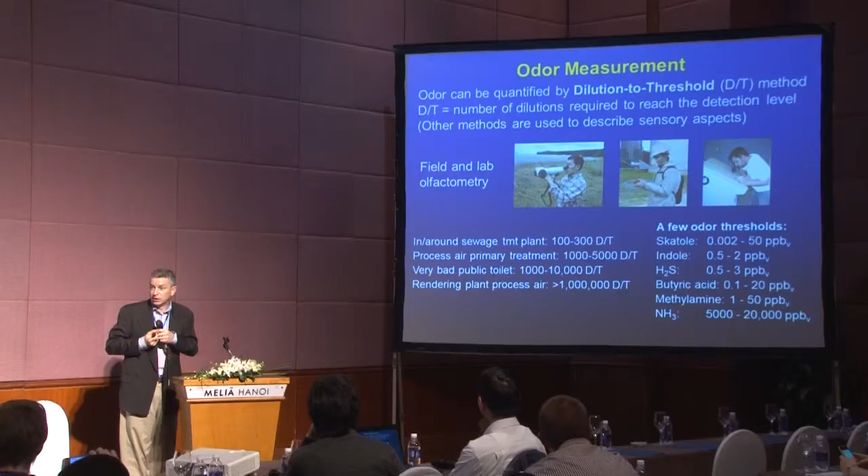Here I'm showing the concentrations that would bring it to the odor threshold of a few substances found in fecal matter—skatole, indole, hydrogen sulfide, etc. What you see here is that the concentrations are extremely low, meaning just a little bit of these chemicals goes a long way in creating nuisance. This speaks to the challenge we have in controlling odors.

There are a number of ways to control odors, and I'm not going to go into a lot of detail, but they can be grouped into essentially three categories. One is preventing odors from being formed or released. One is controlling odors as they're being formed so they don't reach a receptor—this can include capturing or destroying the odor, or transforming it into something less odorous or non-odorous. There are a number of techniques that can be used to control odors, and we'll hear more as well about sensory methods.

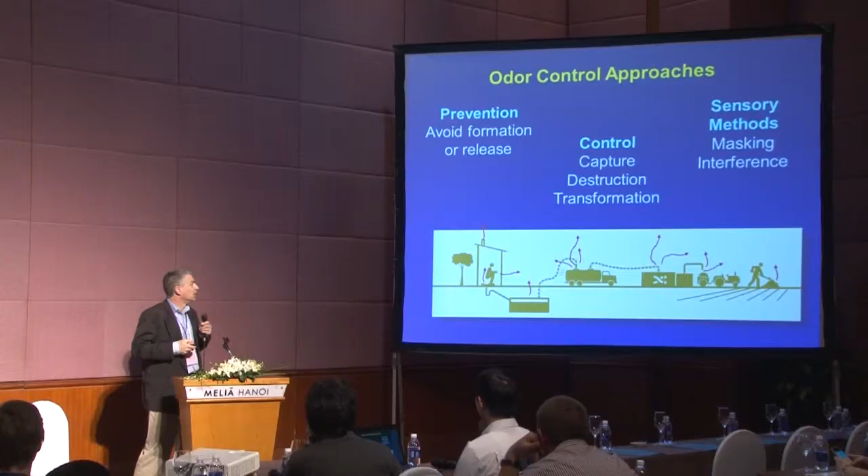Masking refers to adding another smell that will overwhelm your senses. Interference is kind of tricking you into thinking that things do smell nice. We'll hear more about that and discuss it too.

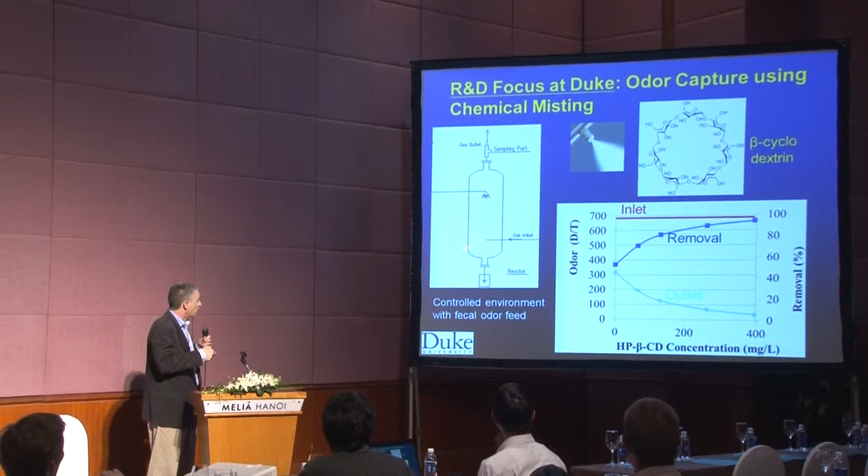We've also been playing with an ingredient of Febreze, which is a cyclodextrin—its cavity is great for capturing smell. We do that in the lab in a controlled environment, working with a reconstruction of fecal smell, and smelling it before and after. This is just a graph to illustrate the sort of studies we do. I'm going to turn it over to Karl here to tell you what he does in his lab.

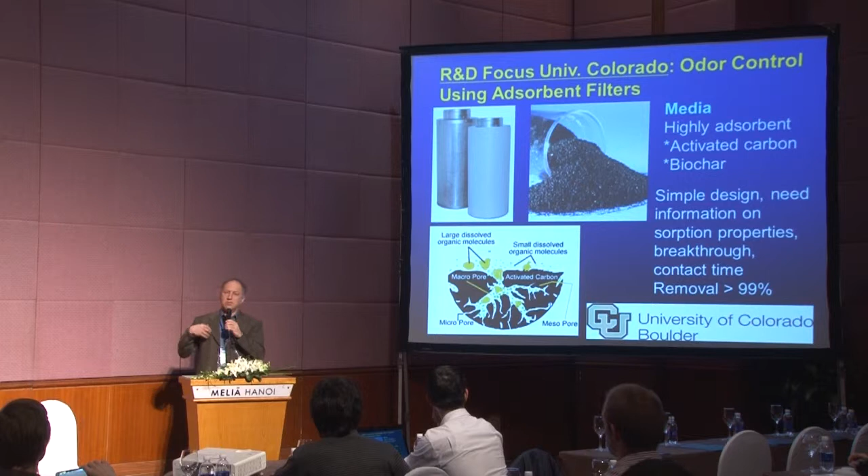In our lab, we're mostly focused on activated carbon type approaches to odor control. Specifically, we've been developing biochars and characterizing those for removing various contaminants from the air stream, the ones Mark talked about. We're also looking at contaminants and odors from combustion processes, such as fecal sludge management practices that use combustion to treat waste, and how we deal with the odors, smoke, and particulates from those processes. You can see some activated carbon and the mechanisms by which those can remove odors up on the screen.

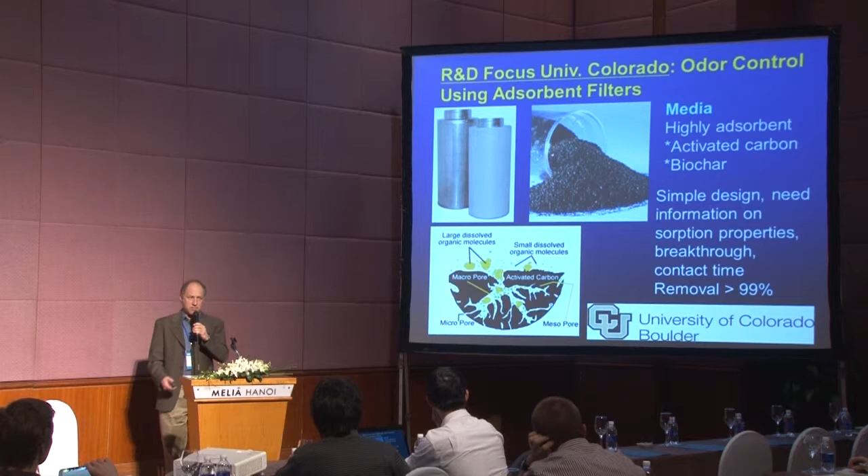Mark and I have a project we're just kicking off on odor management, and each of our groups is looking at different aspects. We're going to look at the carbon side, Mark will look at the biological filtration side, and this is an add-on to the Bill and Melinda Gates Foundation Reinvent the Toilet project.

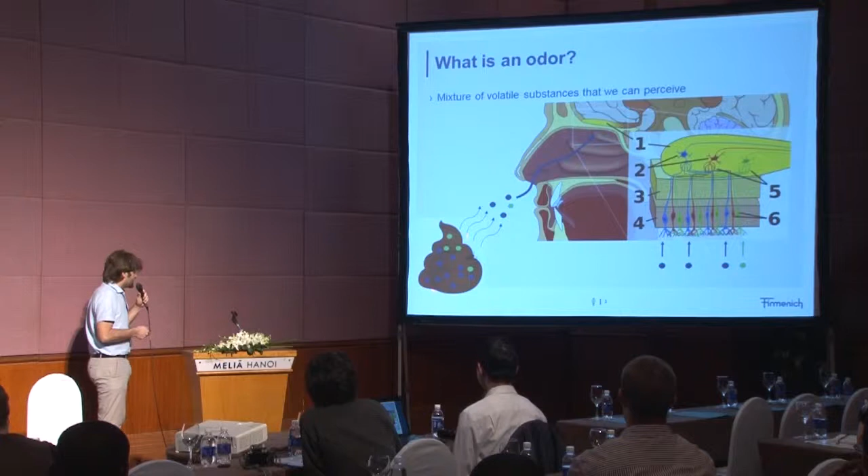So what is a fragrance? What is an odor? An odor is a mixture of volatile substances that we can perceive. To detail this, let's take an example randomly: a stool. A stool is composed of a lot of different molecules, but just some of them will pass into the air. This is a critical step, because in order to smell it, the molecule must be in the air. Then, when you smell, you suck the air into your nose, and the molecule will reach this region here that is magnified. The molecule will interact with chemical sensors we call olfactory neurons, and these neurons will code this chemical signal and send a message to the brain that creates the perception of odor. What's critical here is that if the molecule cannot interact with the olfactory neuron, we will not be able to smell it.

So to create a perfume, the perfumers need to know the enemy. The perfumers need to know which molecules compose the malodors of latrine.

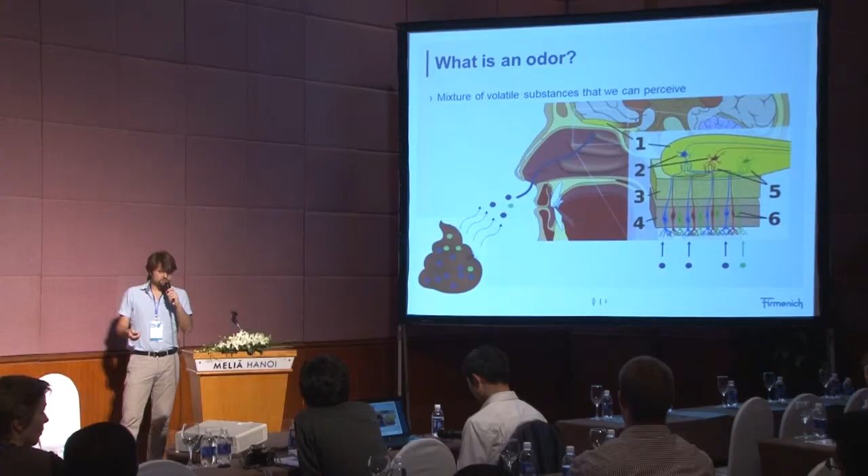As you notice, the malodors of latrine come from the sludge. My colleague, a few years ago, went on the field in India and also in Africa to collect samples of the sludge and identify the key odorants in this sample of sludge. This work was published in Environmental Science and Technology.

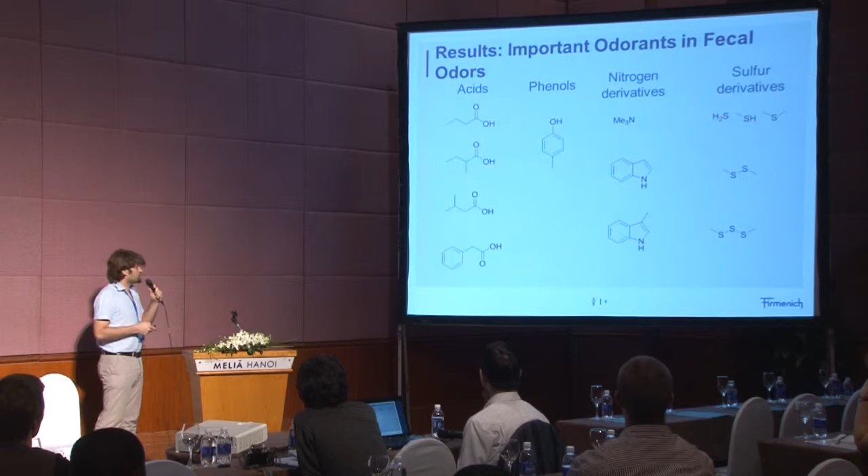So what they found is that we have 4 categories of odorant molecules. First, the acids that give this vomit, cheese, or dirty socks note of the latrine's malodors. Then we have the phenols with cresol that give the animalic note. And the nitrogen compounds with indole and skatole that are more fecal.

And at last but not least, the sulfur compounds that will give the cabbage and sewage notes of the malodors of latrines.

So now we know the enemy, but perfumers need a stable reference to test their creation, to be able to say, okay, my creation can mask or cover these malodors. But you probably imagine it's not possible to use fresh sludge because it's not stable and it's not practical. So we make reconstitutions with synthetic compounds.

One of these reconstitutions we call fecal, with 4 molecules: butyric acid, p-cresol, indole, and dimethyl trisulfide. We made another one with 8 molecules, more complex, we call latrine, with all the acids, p-cresol, skatole, in addition to indole and dimethyl trisulfide.

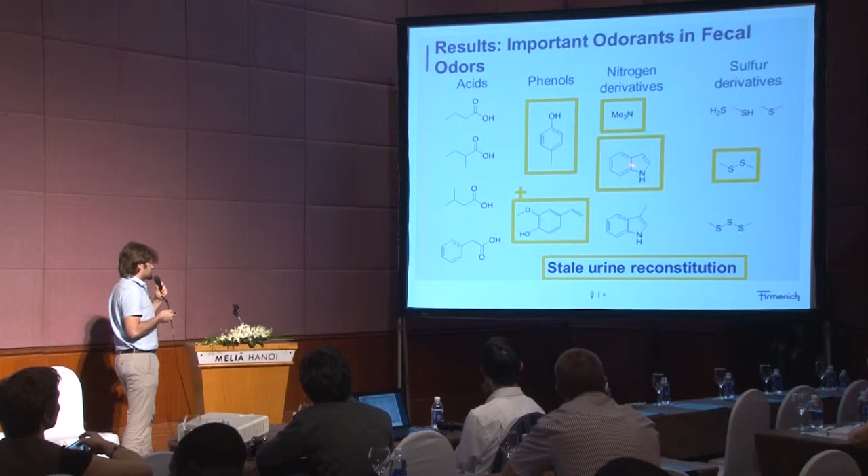From previous work, we did another reconstitution of stale urine because we think stale urine is also very important. It's composed of p-cresol, indole, trimethylamine that gives this fishy note of stale urine, dimethyl disulfide, and also vinylguaiacol. So now we have the reconstitutions, but we don't know if these reconstitutions in India or in Africa can evoke a similar olfactory experience to that of using a latrine.

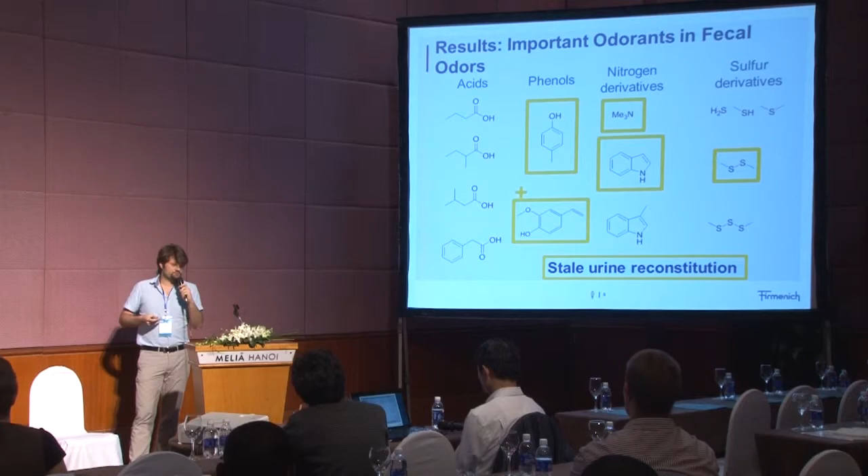To answer this question, we made a sensory survey in Ahmedabad, Nairobi, Durban, and Geneva, where participants had to smell our reconstitutions in addition to pleasant odors, and these odors were delivered by sniffing sticks. This is a stick that contains our reconstitution. You can open it and smell it.

So if you are courageous enough, you can come to me after this session to smell our reconstitution, but also nice odors.

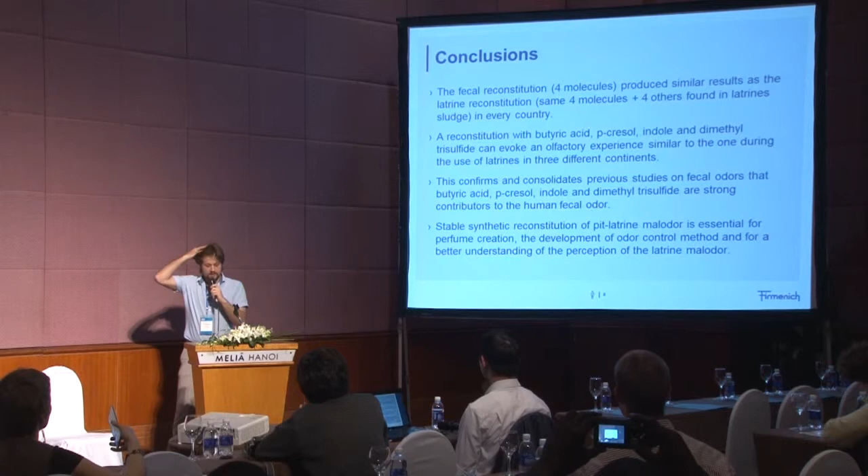So from these results, we can say that butyric acid, p-cresol, dimethyl trisulfide, and indole are strong contributors to the latrine's malodors, and this confirms and consolidates previous studies.

So now we have a stable reference of latrine's malodor that will help perfumers create efficient perfume to cover these malodors, but it's also a step forward to understand the composition, but also the perception of malodors of latrines. Thank you very much for your attention, and I'm really pleased to answer your questions.